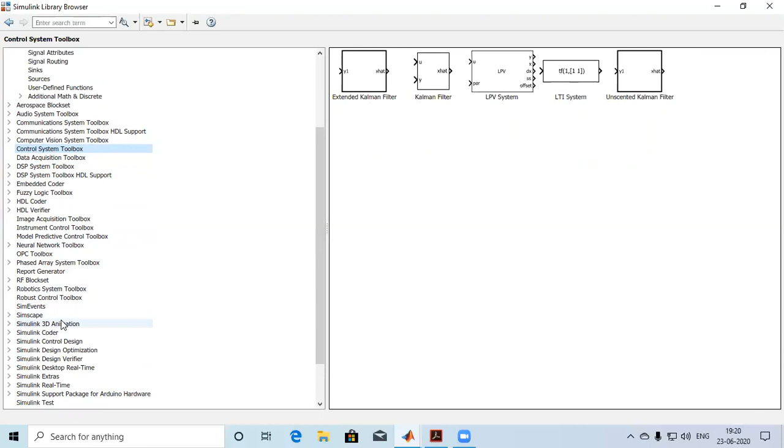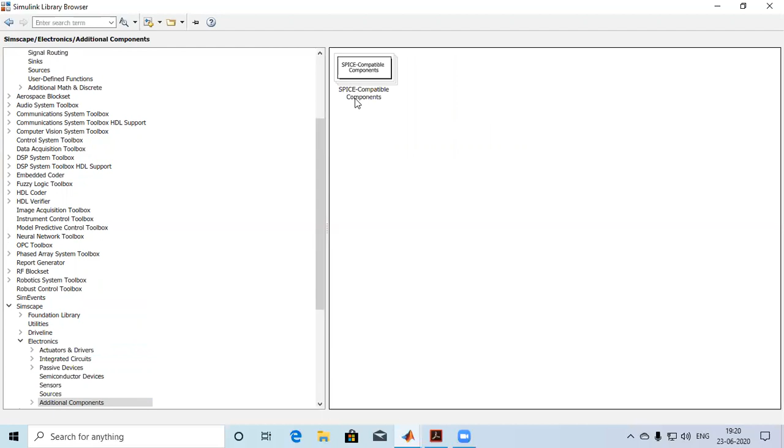Simscape. Here is the foundation library with primary tools. You can see electronics here. You can see actuators and drivers, ICs, passive devices, additional components also, which I already used in this SPICE simulation tools.

Here, neural networks is useful for artificial intelligence and machine learning. Fuzzy logic toolbox is useful for the FACTS controller.

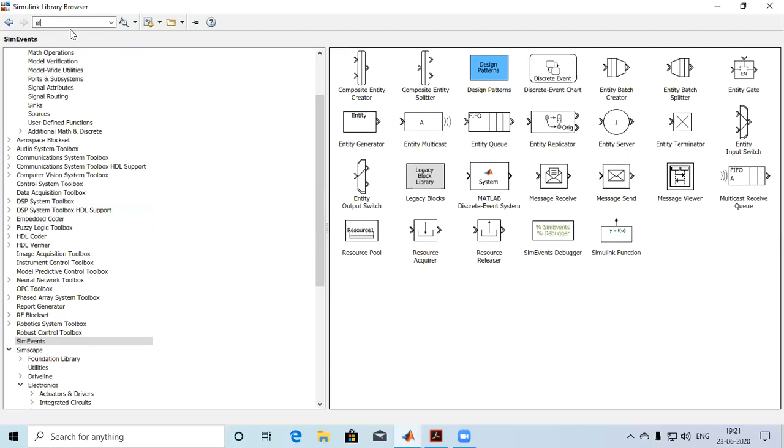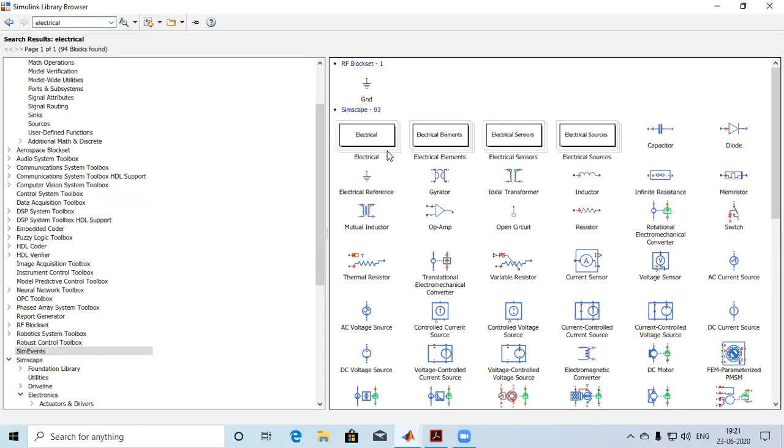Now we can see about the electrical toolbox. Searching here is Simscape, which is a tool under the Simulink window. You can see about electrical elements, electrical sensors, sources.

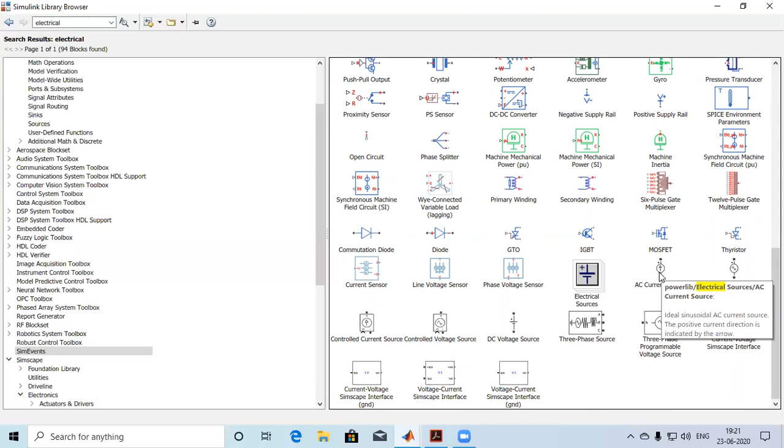The blue color shade for the components indicates components under low power applications, which is useful for electronics design circuits. Here, the black color indicates shades of components for high power applications like 220 volt, etc. Such components indicate about 5 volt, 24 volt, etc. This section and this section are not able to interconnect, which gives an error message.

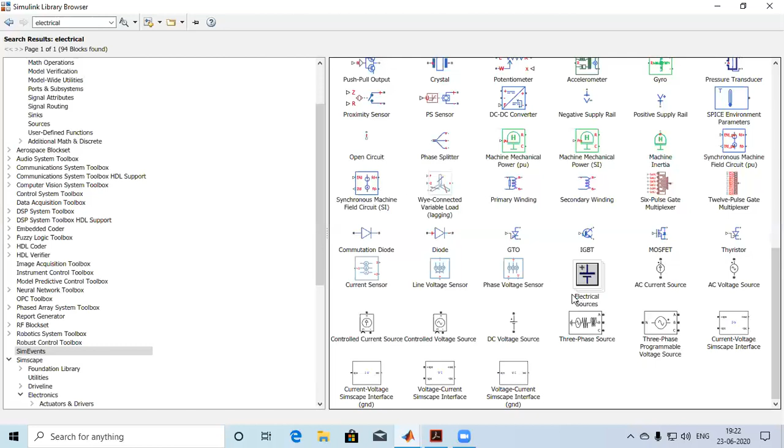Here are the electrical elements: capacitor, diode, reference, etc. Rotational, electromechanical converter, etc.

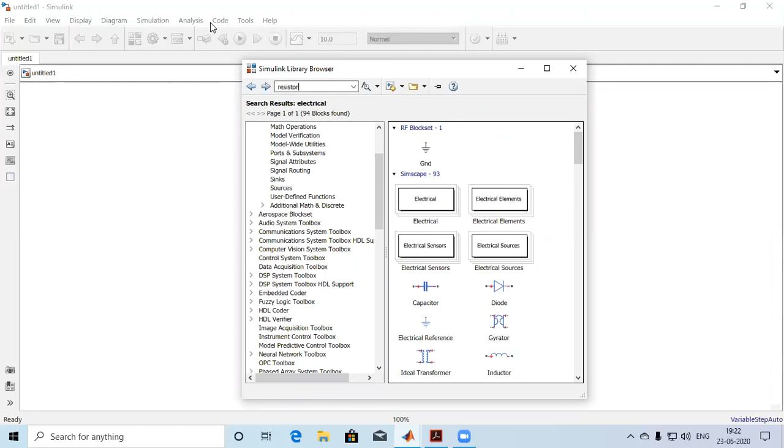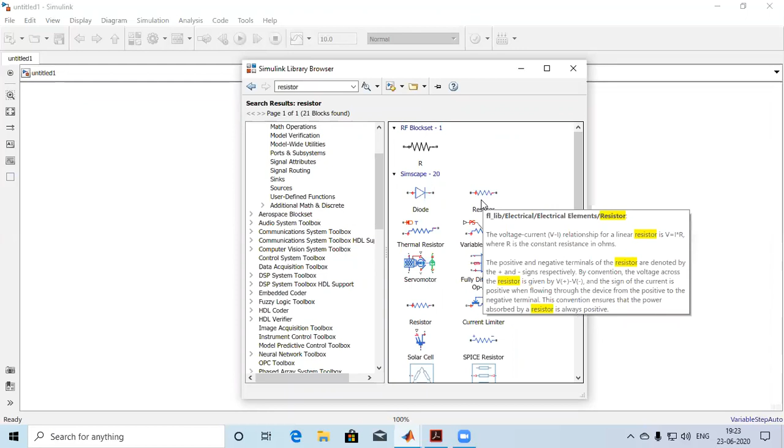Here we can see the difference in the color of the components. The blue color indicates a low power application. Black color indicates high power applications.

Here we can see the resistor which is in a shade of blue color, which means low power applications, such as that DC source. Next we see about the DC source.

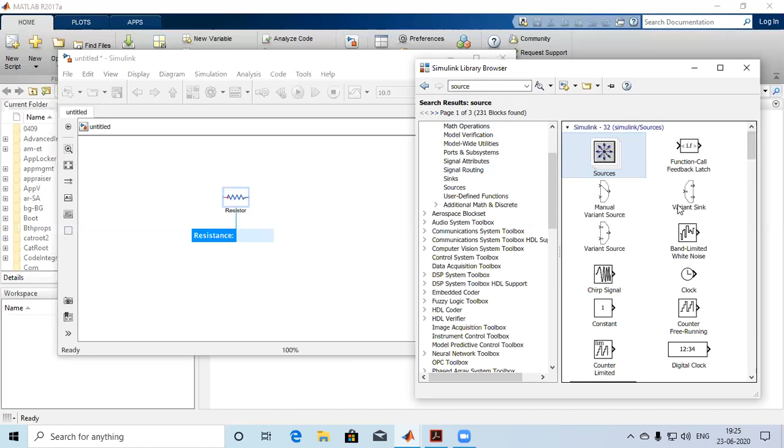Some error is here. We see it. Let's see another example.

Now the power electronics circuit can be designed.

So we can see the major difference between this AC voltage source and this AC voltage source. The main difference is about the power application. Here we can see the blue color shade is for very low power applications, and this is for high power applications. Let's see first the low power application, such as the rectifier circuit.

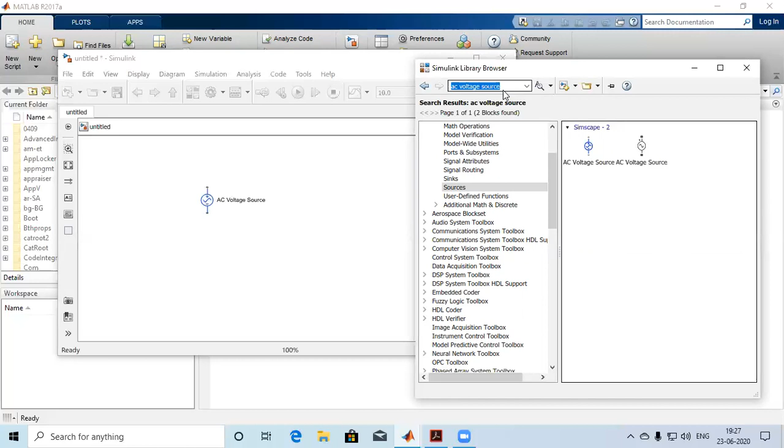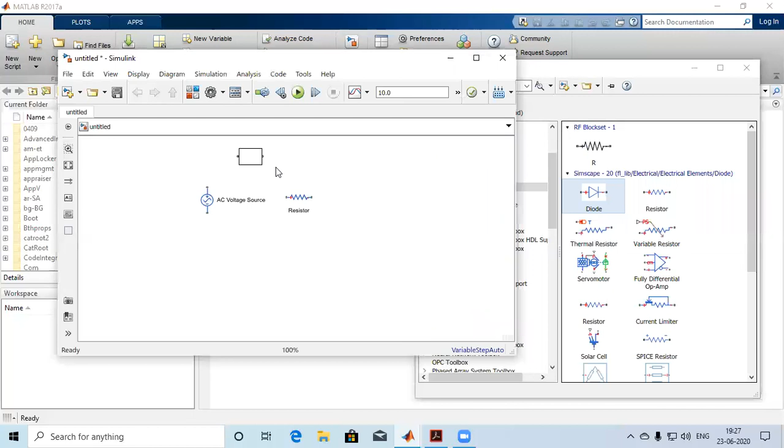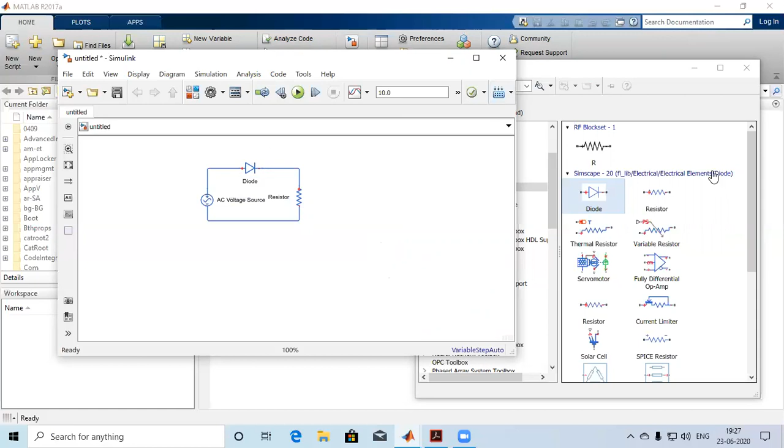Connected. Next is for voltage measurement.

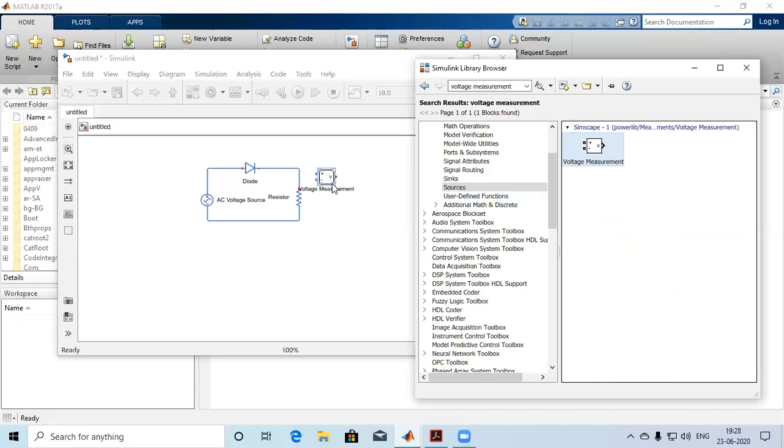Now we can simulate the circuit. Here is the logic analyzer for getting the output. Let's just minimize it.

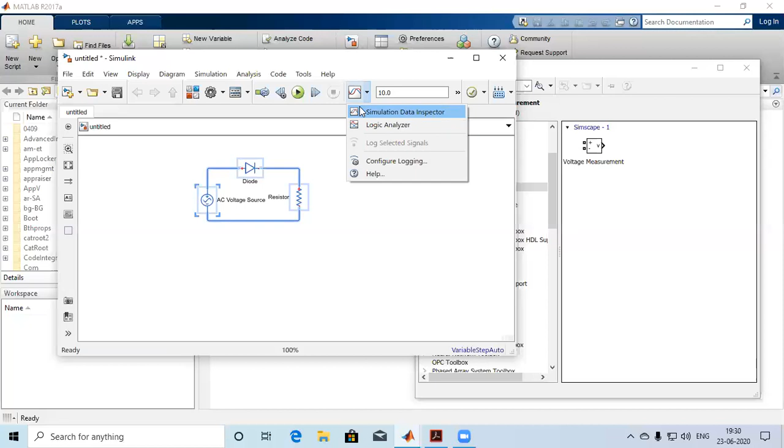First, select the circuit. Simulation data inspector, which allows like a CRO probe for real-time visualization of the outputs. Log selected signals. It is the help window which can be used for reference.

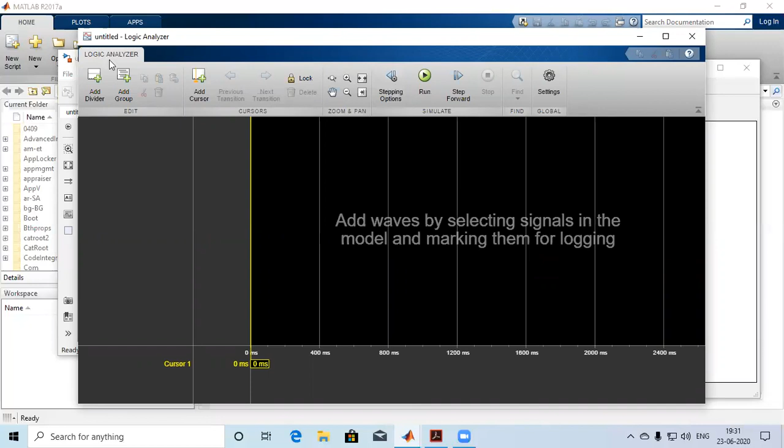So here are some things which are useful for power electronics. Let's move to some reference material.

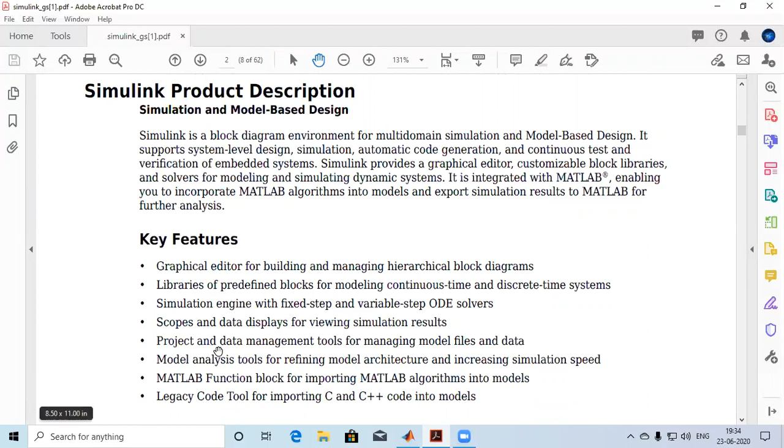Next is the model-based design. For a bulky circuit, we can create a model such as a subsystem, creating a port for the input and output. We can minimize the size of the circuit diagram. Model-based design allows a common design environment applicable for input and output ports.

Simulink designs identify errors continuously, which is otherwise tedious for the designer to locate. By creating models, it's easy to detect and correct errors. Refine algorithms, which means a constant methodology for all the models.